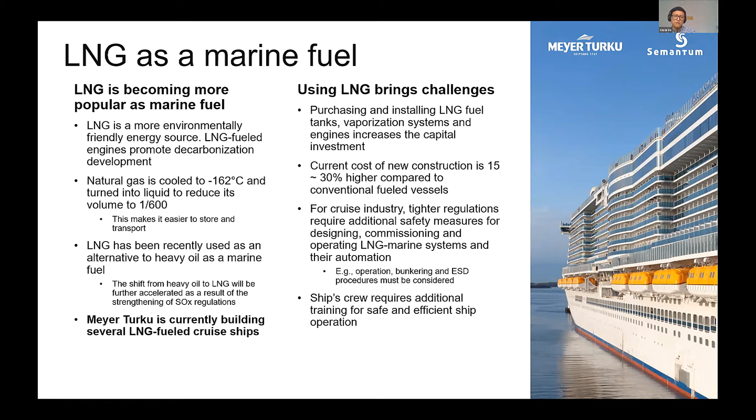Important to say that Meyer Turku is currently building different ships based on LNG. And of course, this brings different challenges, as Markus will also tell. For example, increased capital expenses, so it's more expensive to build these ships. And Meyer Turku is mainly building cruise ships. In the cruise ship industry, there are tighter regulations when it comes to safety of the passengers. And because of this, there's also a need to train operators and crew members so that they can operate these LNG fuel systems efficiently and also safely. But Markus, would you like to tell us more? What are the motivations for this project?

Yes, thank you, Gerardo. So I have gathered a few bullet points about our motivations and a little bit about the project. Where we have now done this testing with Semantum is a big cruise ship, and we will deliver it with a new type of LNG system. The LNG system is not the same as what we have delivered for previous vessels lately. So that is one key item.

Another important key item was that the owner requested HIL testing in the ship contract, and that was the main driver when we started this whole project. And during this project, we noticed that HIL testing is too extensive a way to do it. So we changed the testing method to MIL and SIL, and we agreed this with the owner. On the owner side, this is the first ship for the owner with an LNG system, so they also want to ensure that everything is tuned and there are no big issues.

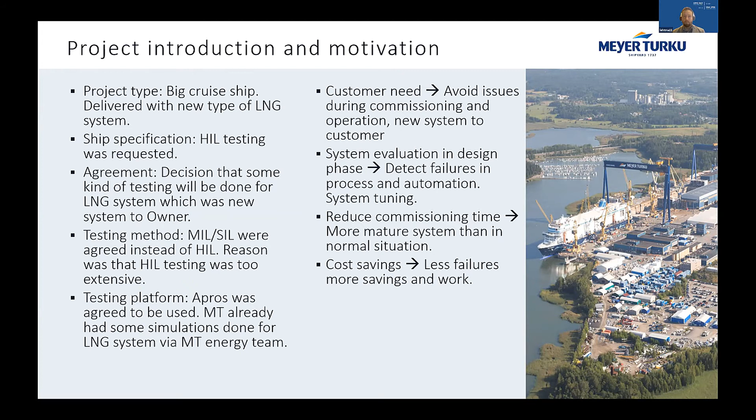So yeah. Right, thank you. Those are the main drivers.

Yeah, thank you. So specifically in this project, what we are doing is we are using simulation-aided methods to test the control application of these LNG systems. The idea is to use a dynamic process simulation model to test either a control application model or the actual control application that will be commissioned and that will be controlling the real system.

Depending on which application we are using, we can either do it on the simulation system where the same process simulation model is available, or we can do it then running the control application on a soft PLC or a DCS emulator or in the actual PLC. One of the main advantages of this is that this is done with a dynamic process simulation model based on first principles, so the testing can be done more rigorously, and the results of these tests are more close to what we would expect on the real system.

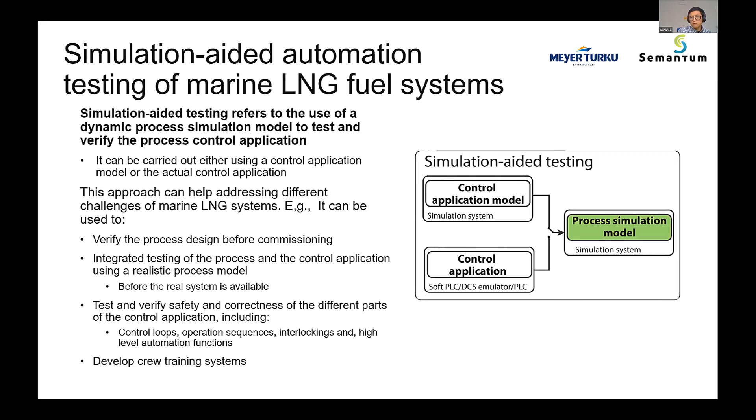Another advantage is that this can be done already during the design before the system is built, so that there's still time to do changes on the control application side, and also there's time to verify the design of the process simulation model.

Specifically, Semantum has been helping Meyer for some years already to use simulation, and Meyer Turku is using simulation for different processes, like for example this MIL testing, but also for testing energy systems and optimizing them. But in this specific project, we are testing this control application using a MIL configuration and a SIL configuration. Here on the figure, you can see what the differences are.

In the MIL, we are running the entire testing using the simulation system because we are using a control application model and a process simulation model. And then once we are sure that this control application model is working correctly and that we have an updated process simulation model according to the latest specifications that were used to build the ship, then we can go to the SIL where we are testing the actual control application.

The purpose of this, again, is to verify process design, to analyze the system behavior of the control application, but also of the process, to test, for example, stabilizing control loops, to test different operation sequences, to test the interlocking of the control application, and basically verify safety functions of the entire control system.

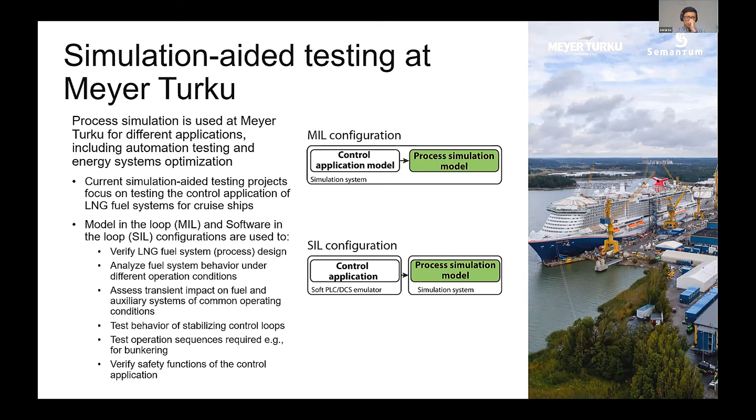Well, now some technical parts of the project itself. We are using the APROS dynamic simulation tool. APROS is a dynamic tool that is developed by Fortum and VTT. Semantum is also helping them to develop this tool. It has been used for power generation processes, but it's also capable of simulating these LNG systems, and that's why we are using it.

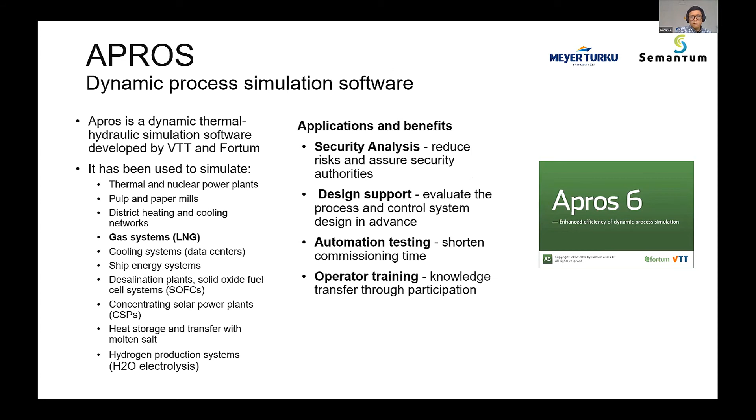Specifically, this marine LNG fuel system, how it works, basically, the LNG is bunkered into different tanks. In this case, for example, we have 2 tanks. The LNG is stored in low pressure tanks, and sometimes there are heat leakages. Therefore, there is a boil-off gas sometimes in the tanks. And this boil-off gas needs to be processed so that it can be used as a fuel later also.

But then the LNG can be pumped and then vaporized so that it is provided to the fuel users. It is vaporized using heat exchangers that utilize a water glycol mixture so that it can give heat, and then this liquid is converted into gas. And it's important to say that in these cruise ships, it's important to have cold recovery from the LNG so that the energy that the HVAC systems require to cool the ship is reduced. So it's possible to utilize this cold that we get from the LNG.

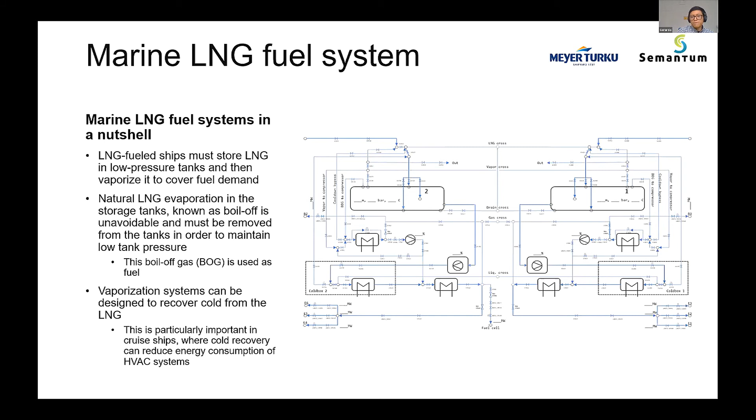So you can imagine this system is quite complex. And on top of that, as you can see here on the diagram, there's redundancy in the system. So there are 2 of each equipment, so that we increase the robustness of the system mainly. And that makes the control application quite complex.

The simulation model was developed by a third party, but during this project, we have been updating it and refining it so that it corresponds to the system as built. And the simulation model is a comprehensive model that includes the entire fuel gas system with all the subsystems, including the water glycol system, and it also has a control application.

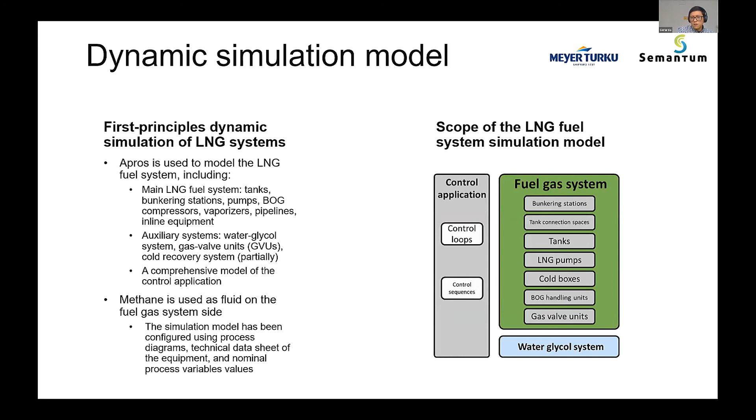Testing manager is an extra piece of software that is used to configure tests in a systematic manner so that we configure the test as a series of sequences. And later, when we want to repeat the test after changing parts of the control application or the simulation model, we can just ask this testing manager to run the same tests again.

On the control system, this control application was developed using PCS7, and then SIMIT is used to grab this control application, and the OPC UA server of SIMIT is used to expose all the address space of the control application. On the simulation system, we have an OPC UA client. So we are using OPC UA to connect all the process variables and the control variables, but then we have to use another protocol or another communication mechanism to handle the synchronization between the simulation system and the control system. Later, we have some conclusions related to this that are interesting.

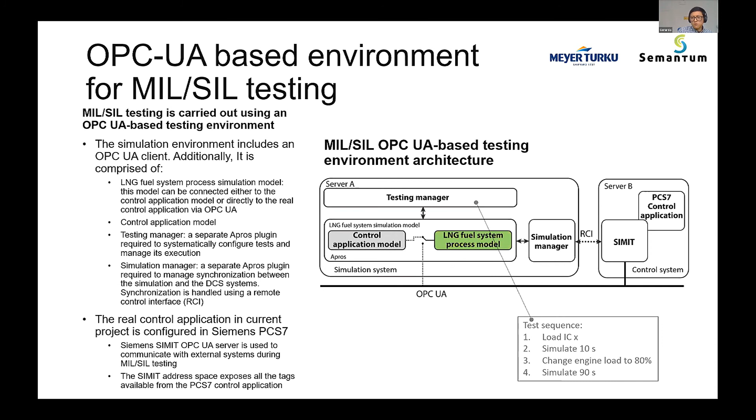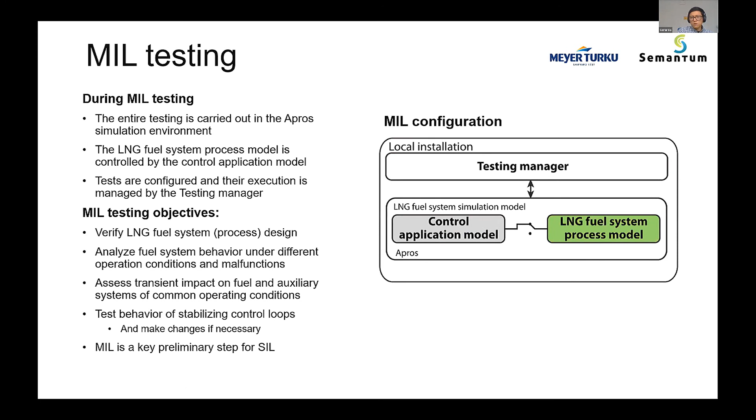The MIL configuration is all done. All this MIL testing is all done on the simulation system. There's no OPC here. But we do this because it's important to verify the design of the system, and we do this because it's a preliminary test towards SIL. Because in SIL, what we are trying to do is to actually test the control application and to make sure that all the safety functions, all the control loops, all the interlocking is working as intended.

So in this SIL configuration, again, we are using OPC UA to communicate all the process and control variables, but still we are using something that is called remote control interface as a communication mechanism to synchronize the execution of the simulation system and the control application. In this project, there are roughly over 200 tags, more close to 300 tags that are exchanging information there.

One thing to say here is that we need to use this RCI, this additional communication mechanism, because OPC does not have any method available for us to do that. But we do believe that it's something that OPC could handle also, so that we don't need this extra communication interface to handle all the synchronizations.

Some conclusions about this project. So MIL testing results, we have been doing roughly 20 tests. I think we can agree that together with Meyer Turku, Semantum as a service provider, Meyer Turku as the shipbuilder, and then the customer, the owner of the ship, we have all gained a lot of insight about this LNG system and how it's working. And we are sure now that certain parts of the design are working as intended. And there were some changes made after the results that we got from MIL.

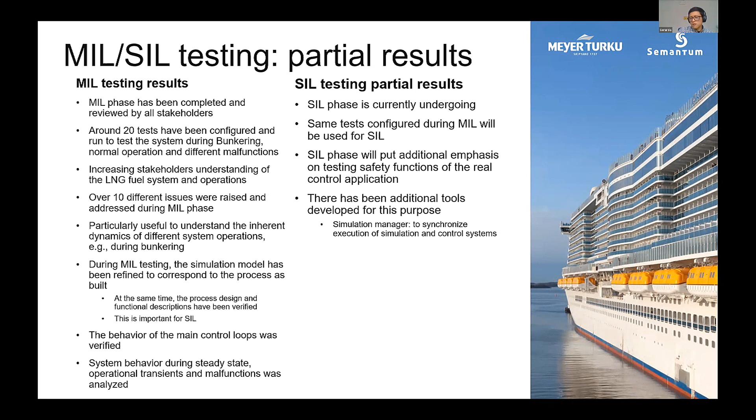And then the SIL phase is currently undergoing. So the same test that we configure in MIL will be then run on a SIL environment. The only difference is that instead of making sure that the design of the LNG system is correct, we are now focusing only on the control application. And that will be the main emphasis of this phase. For this, we have built different tools in Semantum to support these activities. One of the main things, we developed a simulation manager to synchronize execution of simulation and control systems. This could have been done using OPC UA, but we are using this extra communication mechanism.

Related to OPC UA, the conclusions that we have is that OPC UA can successfully be used for this. But again, we still need to handle this synchronization using an external communication mechanism. And we are wondering if it would be possible for OPC UA to also have some type of additional specifications to handle this. So for example, it would be good if OPC UA could have methods for starting or stopping the simulation, or for saving or loading initial conditions.

And this would be useful not only for this testing of control applications, but for any application that requires connecting a simulation system with an OPC UA server, or with a control application. For example, in training simulation systems, or also for developing these digital twins based on simulation for operation support. Markus, would you like to give some final conclusions from the Meyer Turku side?

Yes. So thank you, Gerardo. So what we have done with the MIL phase, I'm very, very happy for the results and findings. And we have also been able to tune our system and make some corrections to our automation software. And from owner side, I spoke a little bit with them. They are also seeing the benefits of this.